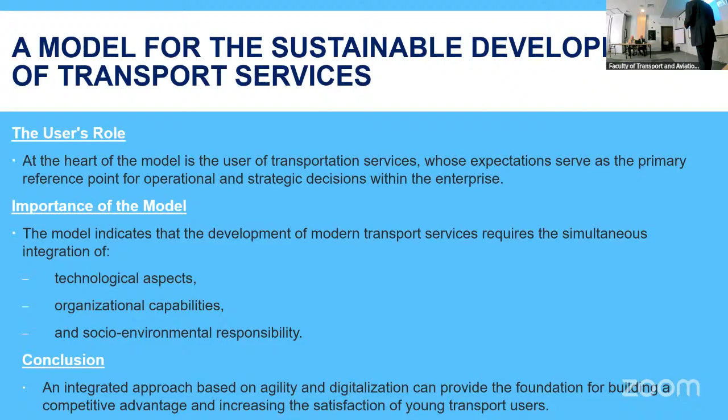Na podstawie przeprowadzonych badań został stworzony model, którego sercem jest użytkownik usług transportowych, którego oczekiwania stanowią główny punkt odniesienia dla decyzji operacyjnych oraz strategicznych przedsiębiorstwa.

Model ten teoretyczny, ale zawierający następujące główne założenia, a mianowicie integrację aspektów technologicznych, możliwości organizacyjnych oraz odpowiedzialności społeczno-środowiskowych. Oczekiwania młodego pokolenia są wysokie, co wskazuje na kluczowe znaczenie jakości oraz nowoczesności.

Trudno dzisiaj wyobrazić sobie jakiegokolwiek młodego człowieka bez telefonu, bez mobilnej apki, który nie oczekiwałby również, aby informacje, które do niego spływają i które mają wpływ na jego decyzje, nie miały charakteru mobilnego. A więc cyfryzacja i komunikacja z klientem mają szczególne znaczenie, stanowią najważniejsze wymiary w ocenie jakości transportu, usług transportowych.

Sprawność organizacyjna przedsiębiorstwa, która tutaj zostało sformułowane jako zdolność do szybkiego reagowania i dostosowania się do zmian. Ja bym dołożył do tego coś, co ex post wyłoniło się z tych badań, a mianowicie w mojej ocenie to jest przede wszystkim kultura organizacji, która decyduje o tym, w jaki sposób firma buduje swoją markę i pozytywny wizerunek.

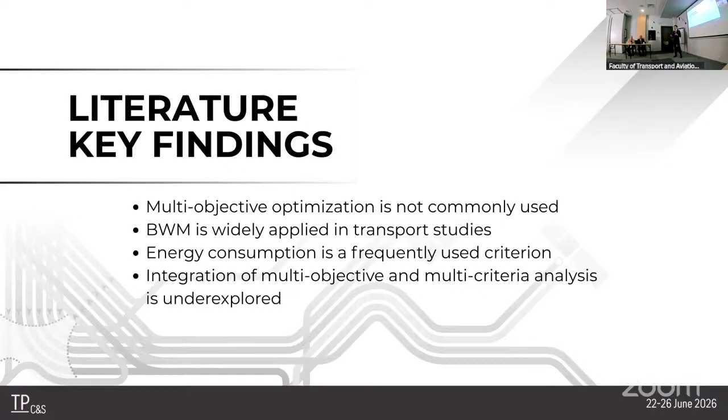A literature review was provided. The main findings are listed here, but most importantly, integration of multi-objective and multi-criteria analysis is still underdeveloped, underexplored, although individually both methods are widely studied.

Our research consists of six main steps. You can see them listed here. The first one is determination of variant schemes, then defining the criteria for evaluating those schemes, solving the criteria weights by applying a multi-criterial analysis, then multi-objective optimization to determine the optimal variant scheme, and finally performing a verification by another optimization method.

As I mentioned before, the first step is determination of the variant schemes. There are certain assumptions for this study, and the main assumption is that no investments are done to improve the infrastructure or the fleet. So the variant schemes differ from one another by the number and the type of the routes they have.

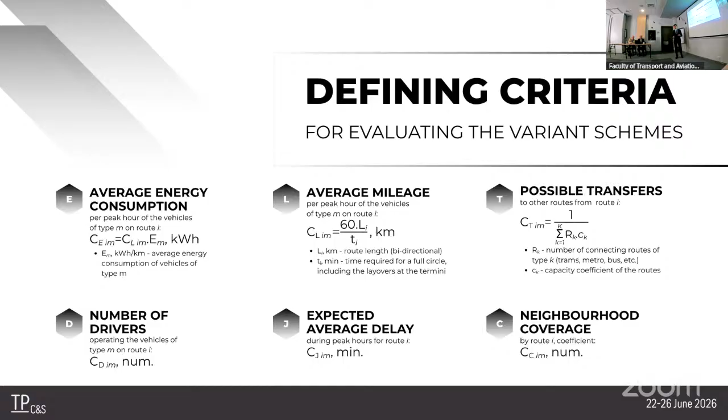6 criteria were defined during this study. The first one is average energy consumption, which was considered the most important criteria for the literature review. Others include average mileage per peak hour of the vehicles, possible transfers to other routes, the number of drivers needed to operate the system, expected average delay, and the coverage by the routes of the neighborhoods in the city.

In order to solve the multi-objective optimization problem, Best-Worst method is used to evaluate the criteria weights. Experts identify the most important and the least important criterion, and then the rest of the criteria are compared pairwise. To evaluate their weights, optimization is performed.

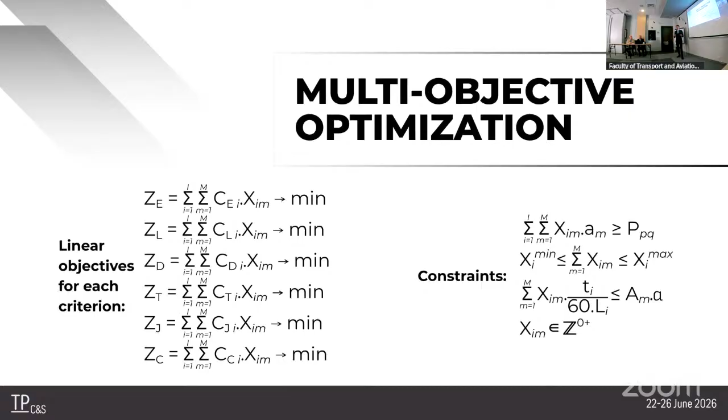So in order to solve the problem, for each criterion, linear objective functions are formed. You can see them here on the left side. And the constraints represent the assumption that no additional improvements are made to the fleet. So we need to keep the number of vehicles used below the total number of vehicles in the city, and also the passenger flow in each section to be below the capacity of this section for the current variant scheme.

Compromise programming is performed to optimize the 4 variant schemes. In this method, the shortest distance to the ideal point is found, and of course the result has to be the closest one to the ideal point and as far as possible from the nadir point.

Verification of the results is performed by another optimization method of the same type. It is a modified epsilon constraint method. The main objective of this method is a function identified as the most important criteria, and the rest of the objective functions are transformed to constraints. Of course, we keep the other constraints as well.

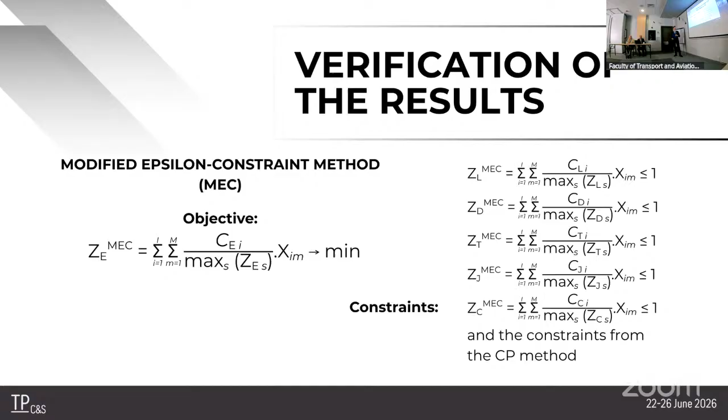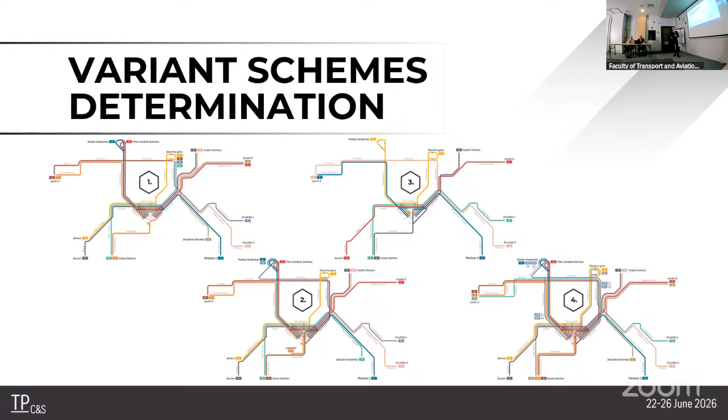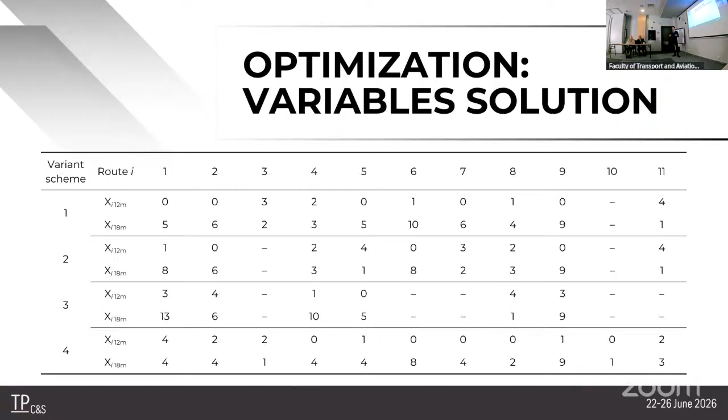These are the results from the optimization process. This table shows the allocation of each vehicle for each route. So this is the main result for the 4 variant schemes.

The optimization results determine that variant scheme number 2 achieves the best overall performance. The consistency between the optimization and the verification actually confirmed that variant scheme number 2, which in both rankings is in first place, is most likely to be the optimal variant scheme.

So in order to evaluate the robustness of the criteria weights, sensitivity analysis was performed. And the results show that the selected optimal solution remains stable for the different scenarios.

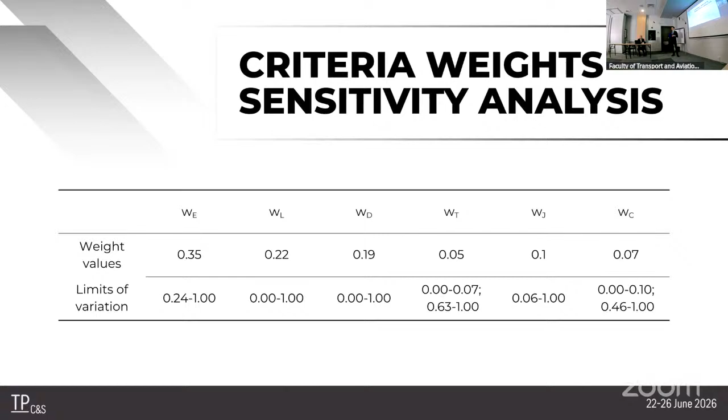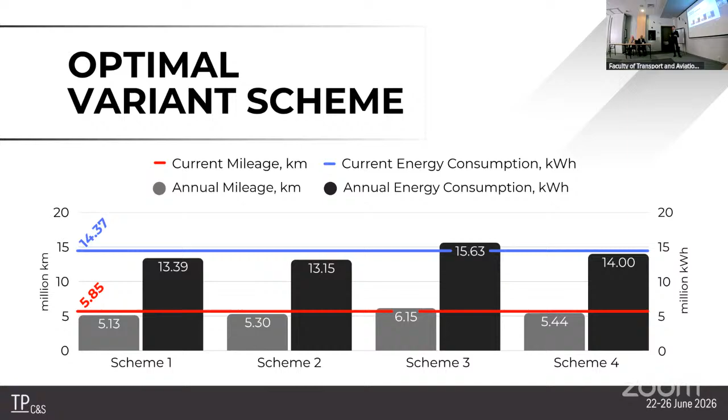The conclusions are that an integrated Best-Worst method and compromise programming can be used to make optimizations of such a network. Criteria were defined to assess the trolleybus transport plan. Energy consumption was identified as the most important criteria. The methodology was applied successfully to the Sofia trolleybus network.

The optimal scheme reduces the energy consumption and the mileage. And most importantly, this whole methodology is applicable to other trolleybus networks, and by slight modifications, it could also be applied to other networks at all, like tramways or bus networks.

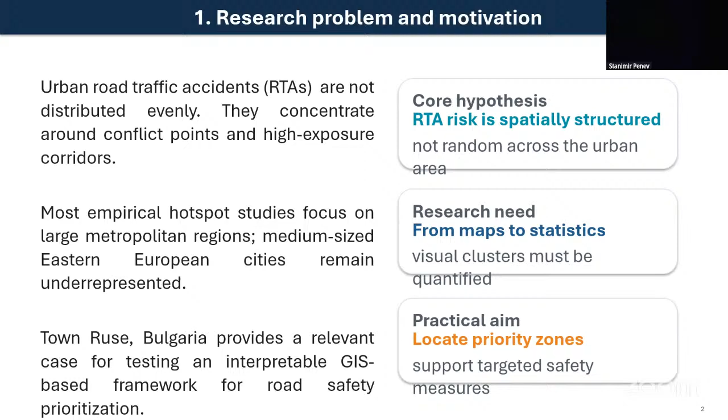Can you change the slide, please? The aim of the study was to identify spatial clustering patterns of road traffic accidents and quantify spatial concentration of accident risk in the studied area. So four main analyses were conducted.

The first one was to construct a grid-based aggregation of the data, which transformed point features, point data, into comparable spatial units. These spatial units had surface measurements and a magnitude that shows whether this small region holds traffic accidents and how many accidents it holds.

This grid-based aggregation was used for the second analysis, the cumulative concentration index, which quantifies spatial inequality. After that, we made an average nearest neighbor analysis, which tests the global departure from randomness, further proving our theory.

The last analysis conducted was a hotspot analysis, which localizes and further confirms our results, localizing the statistically significant hotspots. The study area was the urban area of Ruse, Bulgaria. The period of the traffic accidents was from 2021 until 2025. 1,690 road traffic accidents were included in this study, including 381 injury-related and 12 fatal cases.

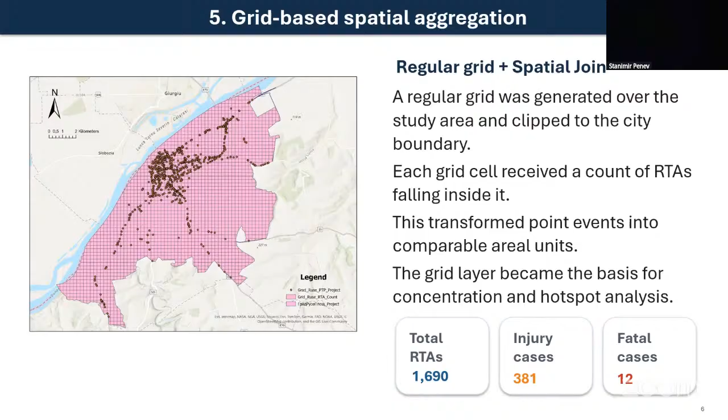The nearest neighbor index was calculated to be below 1, meaning it's highly clustered. The observed average distance to the nearest neighbor between the traffic accident points is related to the expected average distance under the theoretical random Poisson distribution. The observed distance was calculated to be 14.79 meters, and the expected distance was 137.12 meters. The nearest neighbor index was 0.108.

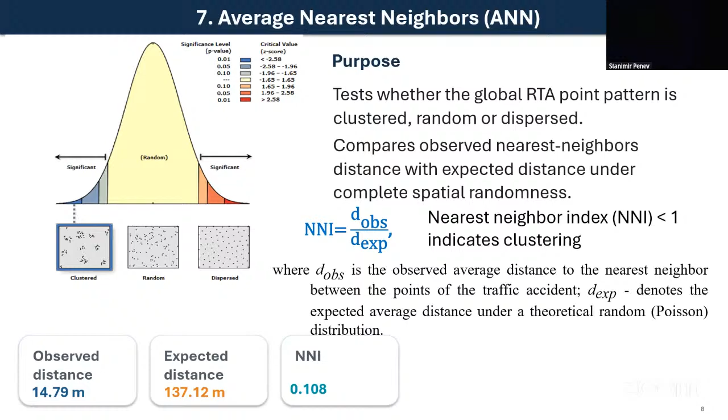The next analysis was the hotspot analysis. A high count cell is not automatically a statistically significant hotspot. The G statistic evaluates whether high values are surrounded by other high values, and the output classifies cells by confidence level from 90% to 99%, as hot or cold spots. In our research we found there are no cold spots—only neutral and hot spots. G compares the local sum of a cell and its neighbors versus the global sum across the whole study area.

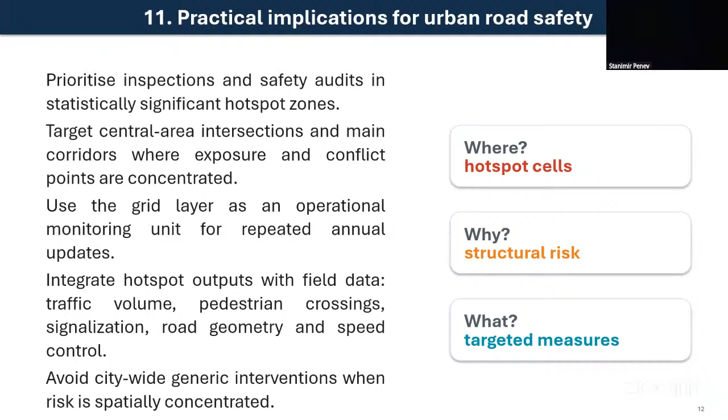The practical implications for urban road safety: prioritize inspections and safety audits in statistically significant hotspots—that's why these hotspot analyses were created. Target central area intersections and main corridors where exposure and conflict points are concentrated; there is a structural risk. The use of the grid layer is operational, and we need to avoid city-wide generic interventions when risk is spatially concentrated.

In conclusion, road traffic accidents in the study area show strong spatial concentration and statistically significant clustering. The concentration patterns become stronger with accident severity. The average nearest neighbor analysis confirms a major departure from complete spatial randomness. The hotspot analysis localizes the main high-risk zones, and the proposed GIS framework—the whole process and model we represented—is transferable, interpretable, and useful for medium-sized cities. The end result is that we created, from raw data records, spatial priorities shown on the map, which can be input into other similarly sized areas of study.

Next slide is from model selection to a forecasting protocol. Limitation of existing approaches: a specific model class is often assumed to be superior, comparisons are limited or in-sample, and different pollutants are treated too uniformly. Operational application is not always demonstrated. Research objective: to develop and empirically validate a structured forecasting protocol for short-term prediction of these four parameters. Working hypothesis: there is no universal best model; the appropriate specification depends on the statistical structure of the series.

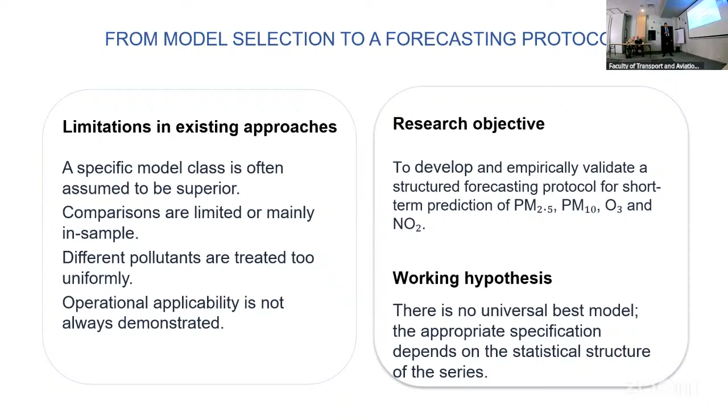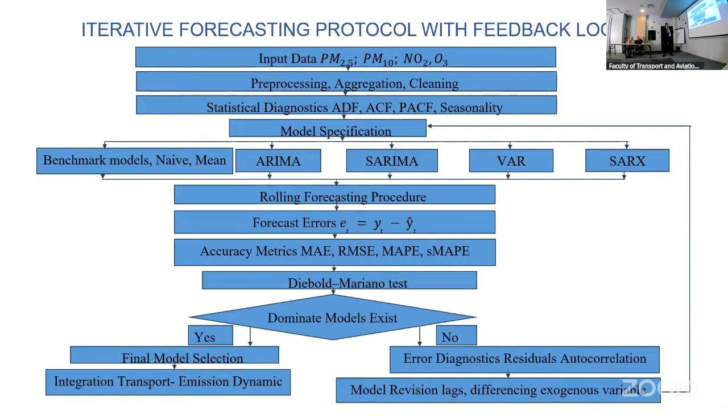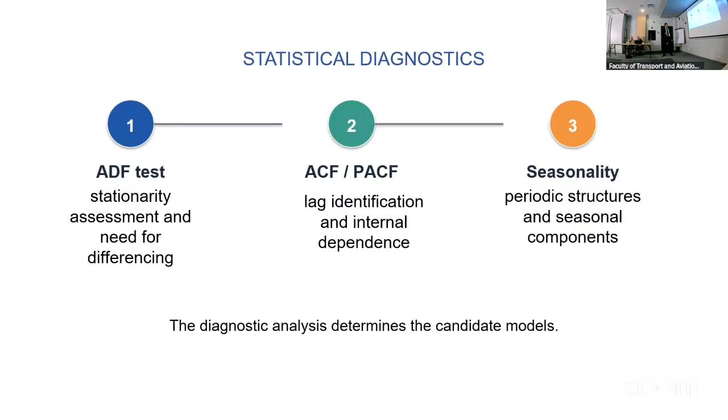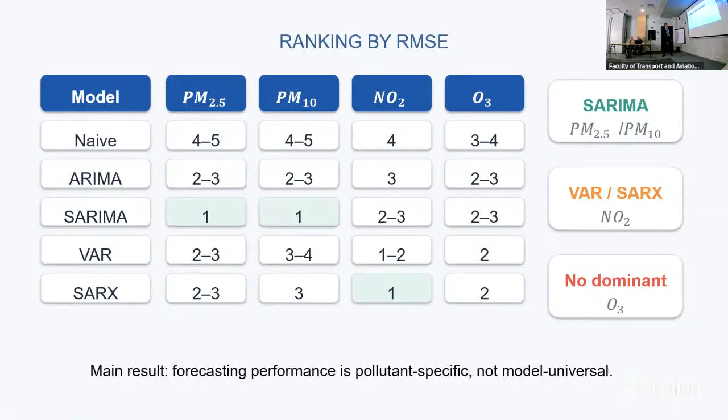These candidate models — you can see five models. The logic is benchmark in univariate structure, seasonality, multivariable dependencies, and selective dynamic effects. This is the one-step-ahead evaluation, with ranking information. SARIMA performs best for PM2.5 and PM10, VAR and SARX for nitrogen dioxide, and no dominant model for ozone — this is the result here.

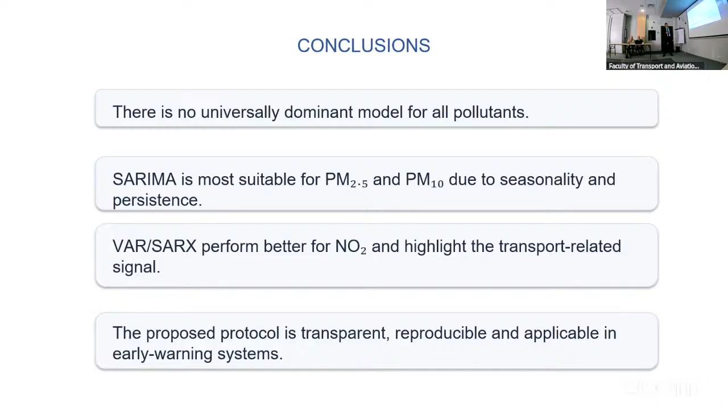Conclusion: there is no universal dominant model for all pollutants. SARIMA is most suitable for PM2.5 and PM10 due to seasonality and persistency, whereas VAR/SARX perform better for nitrogen dioxide and highlights the transport-related signal. The proposed protocol is transparent, reproducible, and applicable to early-warning systems. Thank you for your attention.

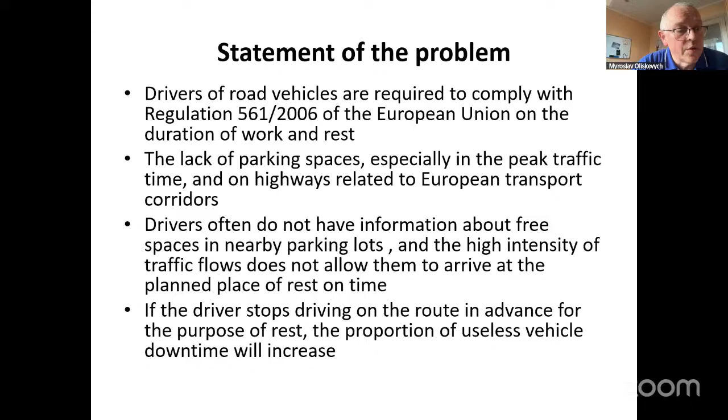Next slide, please. Parking trucks can become a serious safety problem when drivers don't have timely information about where free spaces are. The driver must decide to continue driving tiredly in search of free parking spaces, or to park in violation of the rules, for example on the shoulder near highway exits. Both situations pose a serious threat to safety.

Next slide, please. The problem is made more serious by the fact that the intensity of free parking spaces changes over time, and that is too uneven. Also, information about free parking spaces is unreliable.

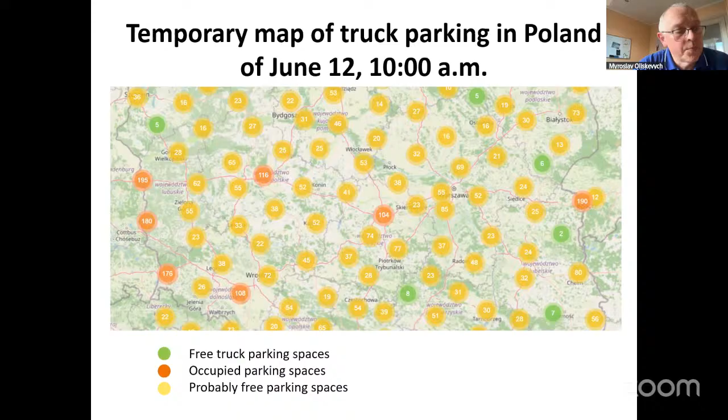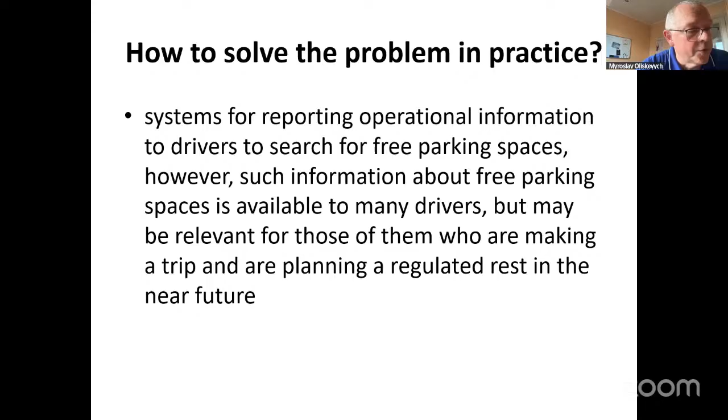Next slide. How is this problem currently being solved in practice? First, there are information services that inform drivers about free parking spaces in advance. However, by the time drivers reach the location, it might already be occupied. Otherwise, the driver faces the unpleasant situation of violating rules, such as Regulation 561 of the European Union. Next slide, please.

Developments in the field of intelligent parking, as well as proposed approaches to solving the problem based on artificial intelligence, do not provide a clear vision of the transition processes of implementing the latest solutions.

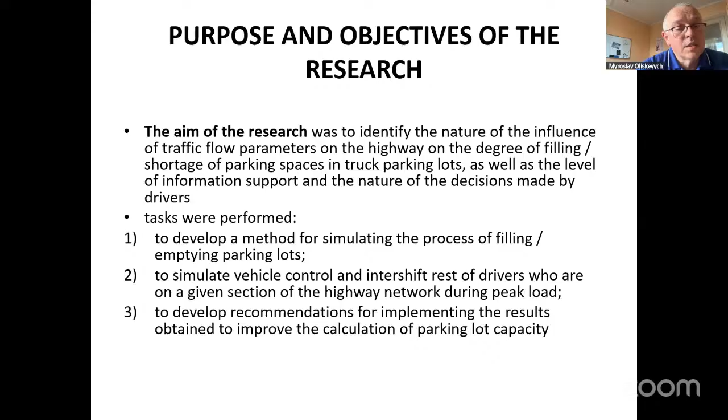The basis of our approach to solving the problem was the assumption that the required number of parking spaces has a non-linear dependence on the intensity of traffic on the highway, where truck drivers are looking for an opportunity to park for intershift rest. That is why we used simulation modeling of the parking process.

The next problem formulated and solved in the work was as follows. A highway was considered, consisting of a minimum of 4 lanes, 2 in opposite directions. The lanes are divided by double horizontal marking of type 1.3 according to road rules. In each direction, there is a possibility for vehicles to overtake. Exit to parking lots on both sides of the road is possible, in both the forward and reverse direction of the highway, and exit from each parking lot to the highway is also allowed from both sides. The intensity of vehicles exiting from parking lots is equal to about 5% of parking needs during the peak period.

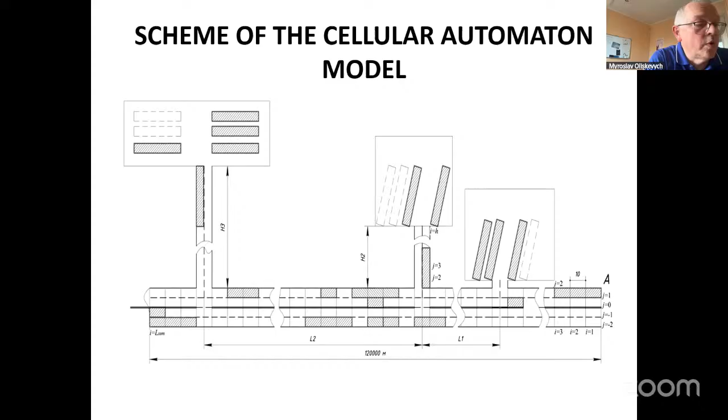The simulation results of each step were evaluated by the following indicators. First, the level of parking occupancy is estimated by the occupancy rate. Second, the minimum level of satisfaction of driver needs for free parking spaces for rest. If the driver does not have information about free parking spaces, but his allowed driving time is T-minimum, then we must determine whether his need is satisfied.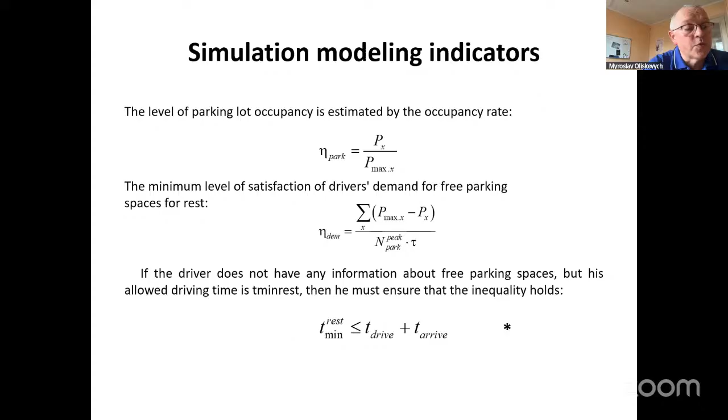Cases of searching for a parking space depending on the available information about the occupancy of the nearest parking lots.

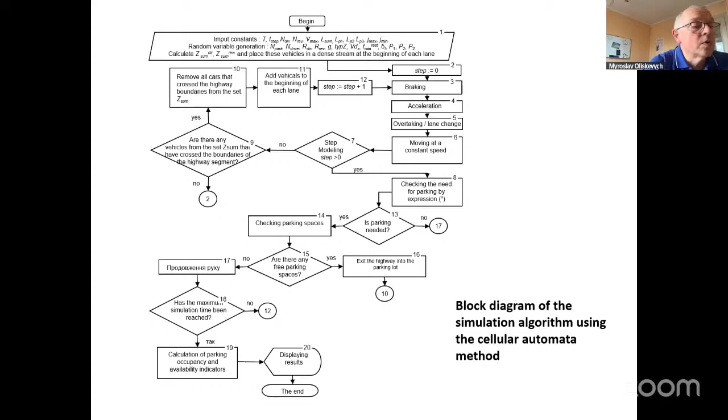A modified simulation algorithm and a computer program for it have been developed.

The simulation was performed under variable initial conditions: the total intensity of the traffic flow in the forward and reverse directions of the highway, as well as variable average density of the traffic flow. In the first group of experiments, the simulation was carried out with 3 parking lots on a 120 kilometer section of highway, with a total capacity of 45 parking spaces.

In the second group of experiments, the total capacity of parking lots was increased by 33%. The obtained dependencies allow us to identify patterns in the functioning of the parking lot network and increase the accuracy of calculating capacity.

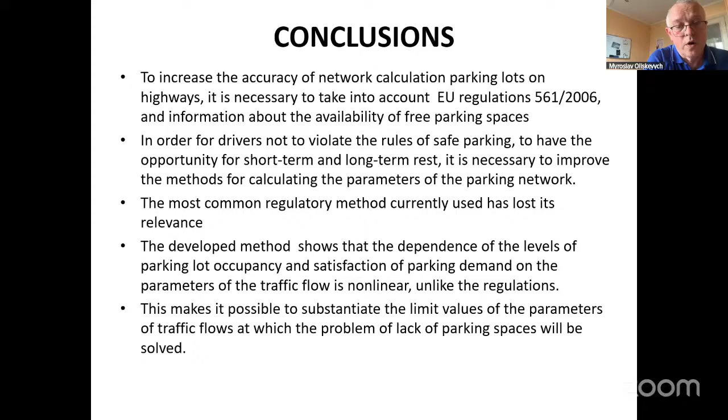Thank you very much. Thank you.

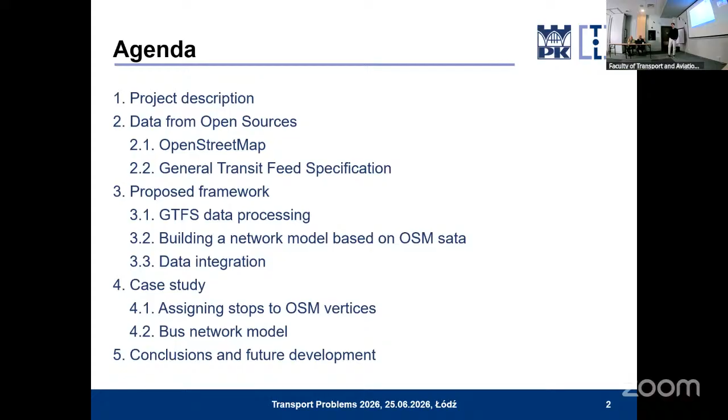Talking about the project, it's a research and development project in cooperation with DPK system, titled An Integrated Transportation Planning System for Metropolitan Public Transportation, with a focus on electromobility and flexible adaptation to rapidly changing conditions. Our cooperation is concentrated on the second part, flexible adaptation to rapidly changing conditions.

So we had a problem. We needed a functional graph that would allow us to use customizable algorithms and different sources of data, maybe our own data, maybe open source data, to conduct our future research. It had to consist of a road network and a public transportation network. We decided to use open source data because it's free and widely used throughout the world.

Talking about transportation and road network, what can we use? Of course, OpenStreetMap, one of the widely used open source datasets. We can use three main options to import the data: Planet, Overpass API, and OSMnx.

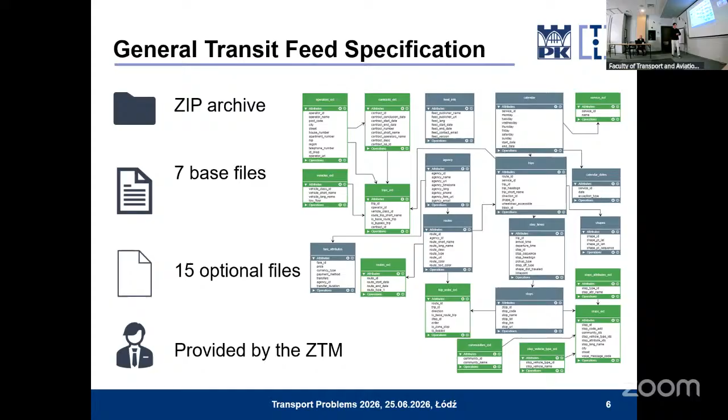On the right side, you see the structure of a GTFS file from the GZM area, Górnośląsko-Zagłębiowska Metropolia, the main city of which is Katowice. Every square represents one file. The green ones are an extension of the optional files and main files. It's provided by the ZTM, Zarząd Transportu Miejskiego.

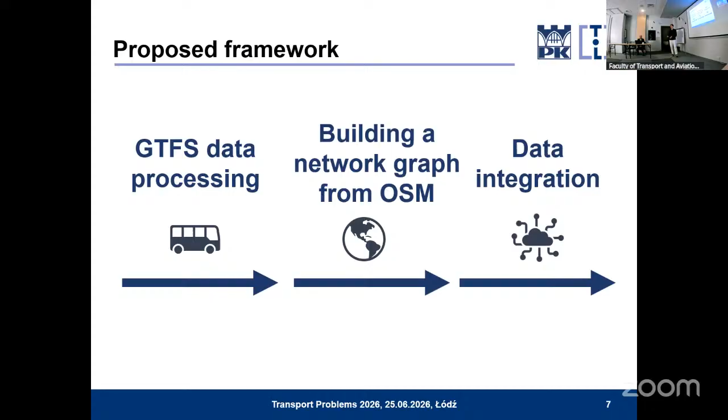Talking about our proposed framework, it's a 3-step approach. In the first step, we process GTFS data, then we build a graph network using OpenStreetMap, and finally integrate all the data together.

The next one is, of course, the graph network. On the right side of the slide, you can see the road network of the GZM. It's really enormous: 35,000 nodes, 80,000 edges, nearly 28,000 intersections. Total length of the roads is more than 14,000, with this average length and nearly 3 average number of streets per node.

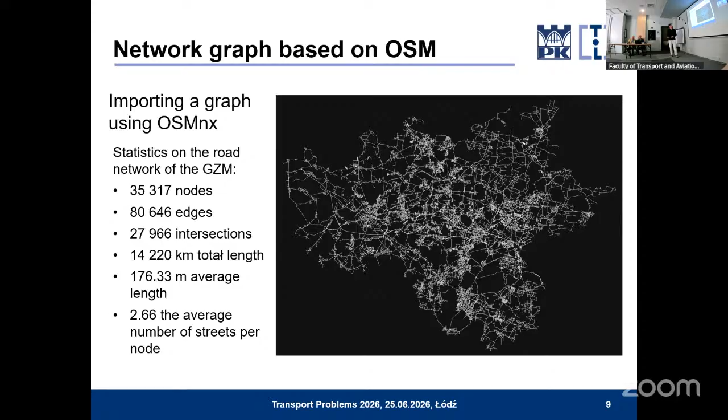Talking about data integration, we had a few steps. We had to filter out the stops with no trips assigned, because that's a real problem with GTFS—not every stop is managed by buses. So if a stop wasn't linked to any trip, we discarded it. If it was, we applied a 2-step approach: find the nearest edge to the stop, then the nearest node from this edge to the stop. This is because of geographical distance issues we had when defining the path from shape to stop to node. Then we save the graph and export CSV files with stops and nodes.

And we validated our framework on the PKM Katowice routes. They operate on 56 routes across the GZM, not only in Katowice. You will see this in the next couple of slides.

It managed 1,281 bus stops and 3,162 trips. Talking about the GTFS published by ZTM, it's a really huge database merged for every operator. For example, in Krakow, one operator has its own files. In Katowice, no.

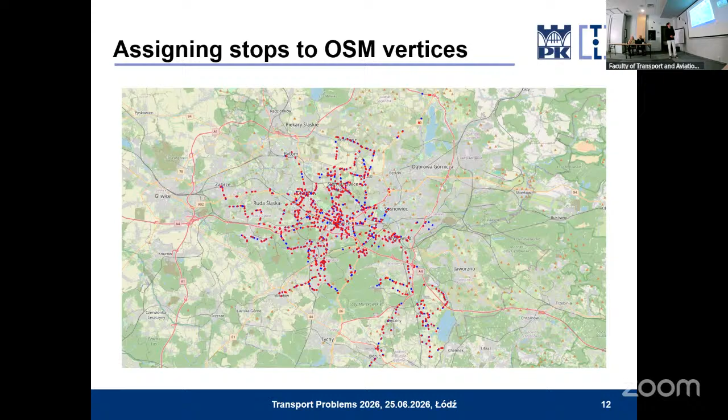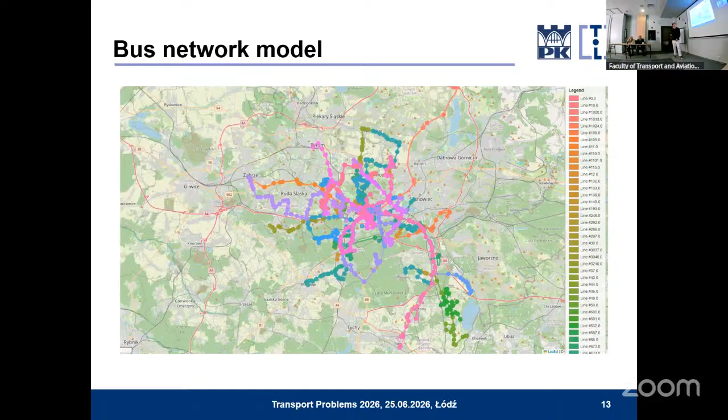Now talking about conclusions and future development: we presented our three-step framework for modeling the transport network with open source data. It was developed in Python, and the main goal was to have a fully functional graph that can be used for future development and research—for example, for emergency rerouting of public transportation in case of accidents, or when civil works will be there, and many other use cases for this graph.

Thank you for your attention.

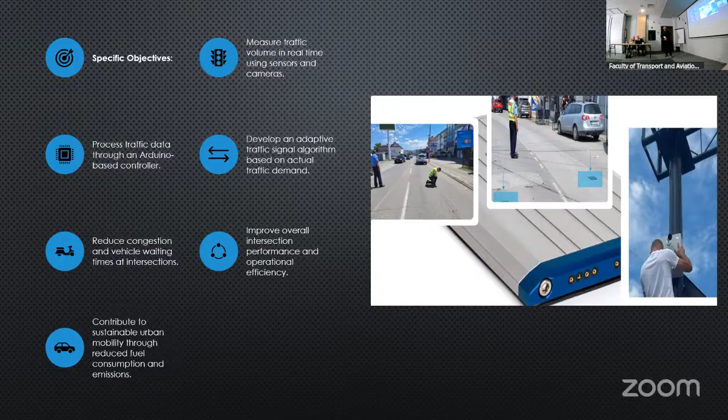In another case, we used a simple camera together with the YOLO algorithm to measure the volume of traffic at the intersection. Two of our students were involved in this research and realized traffic control by constructing a prototype based on smart techniques. In the first prototype, we used an Arduino microcontroller and two types of sensors, infrared and ultrasonic, to measure the queue of vehicles at the stop line of the intersection.

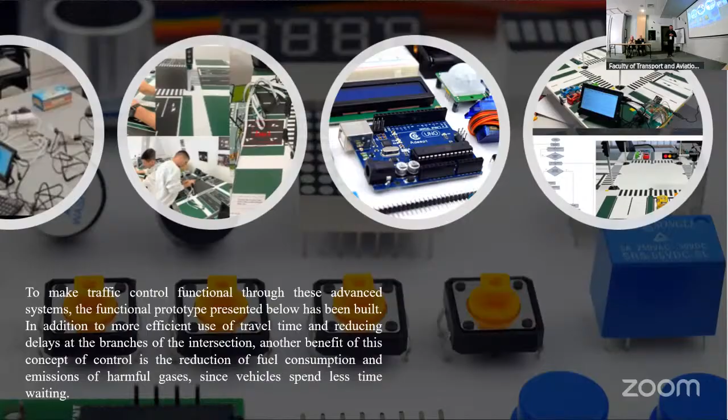The principal work of this prototype is based on real traffic data from each arm of the intersection. When the first vehicle arrives at the stop line, the infrared sensors measure this and send information to the controller indicating vehicles present in this arm. Then priority is given in the traffic light, and the green light turns on for this arm. Next, if any sensor in any arm of the intersection detects the presence of vehicles, the green light opens for that next arm. But we must limit the maximum green time, because if there is demand from all arms of the intersection, we have to cap the maximum green light duration.

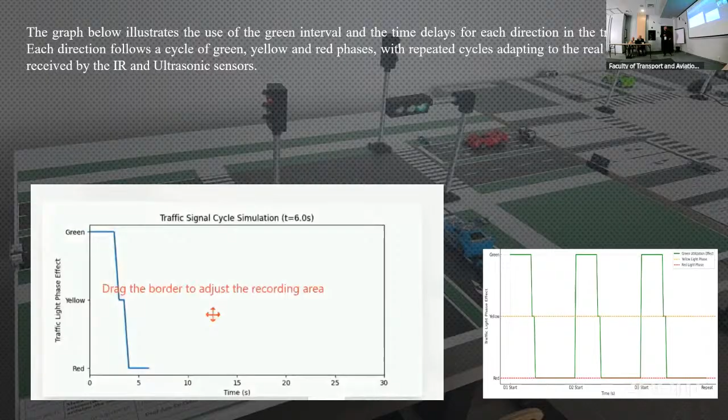This is the principal work of this prototype, involving technology and smart techniques using microcontrollers and sensors. The results also prove this — you can play the short video showing this diagram. The results show we achieve more effective green time usage at this intersection by using these devices and this technology.

This research and these prototypes have also been part of the sustainable urban mobility plan of some cities in Kosovo, and in the smart component field, we proposed implementing this kind of solution. I am happy to share that some municipalities in Kosovo have started using this kind of prototype, because as I said before, all intersections are controlled by traffic lights in principal operation. Please, you can play the video.

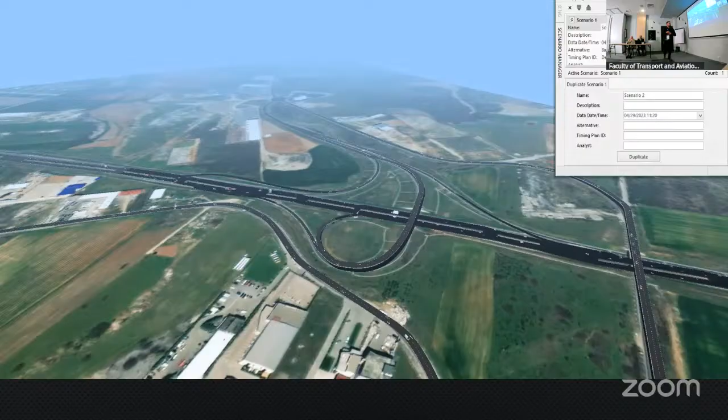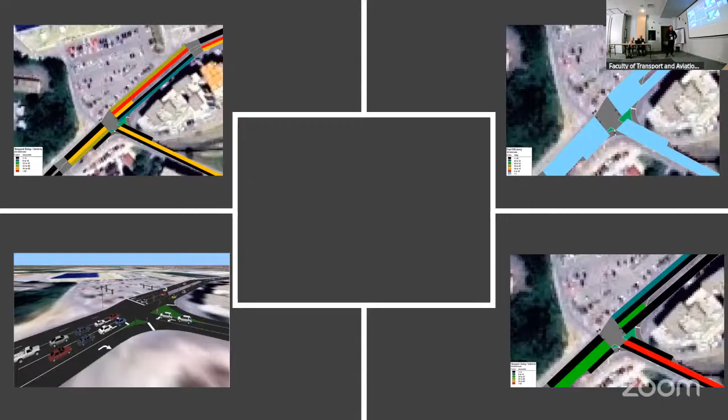In this case, we also used software to analyze some traffic indicators, including traffic delay at the stop line of the intersection. The entire road network of the city is included in the simulation, along with two intersections controlled by traffic lights where we applied this proposed research. When we analyzed traffic indicators for the intersection controlled by traffic light, we saw that some indicators improved, and overall the performance of traffic operation at the intersection improved compared to traffic lights controlled by fixed timing.

As a conclusion, I can mention that traffic delay at the intersection, based on real traffic data from each arm, is improved. Also, fuel consumption is improved at this intersection because we reduced red light time, and vehicles wait more or less accordingly at the intersection. This is also in line with sustainable urban mobility principles.

So I think the best solution for traffic management is to combine political support with technology, and integrate responsibility from institutions and from industry. Thank you very much for your attention.

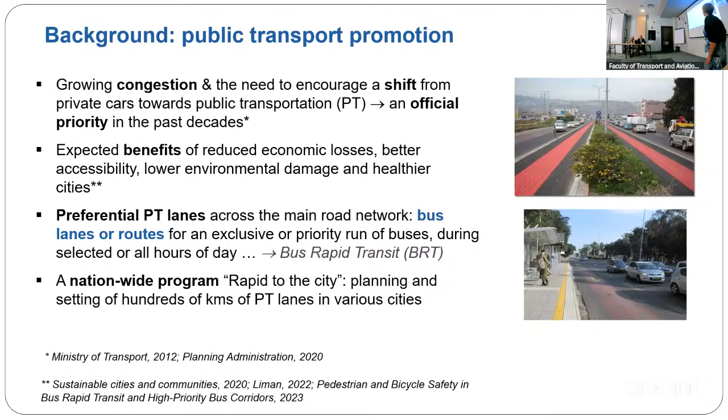Currently, preferential lanes for public transport are established across the main road network of the country in the form of bus lanes or routes for an exclusive or priority run of buses during all or selected hours of the day. The ultimate form of such arrangement is known as bus rapid transit, or BRT. Nowadays, a nationwide program termed Rapid to the City is implemented in the country, which includes planning and setting of hundreds of kilometers of public transport lanes in various cities.

To attain the mobility and other benefits associated with public transport priority, driver compliance with such priority settings is needed. The national traffic signs regulations in the country demand to indicate such lanes using yellow marking with yellow diamonds on them. You can see it in the picture.

In addition, we have guidelines for planning BRT, bus rapid transit lanes, and there we can see the addition of red color stripe marking on such lanes.

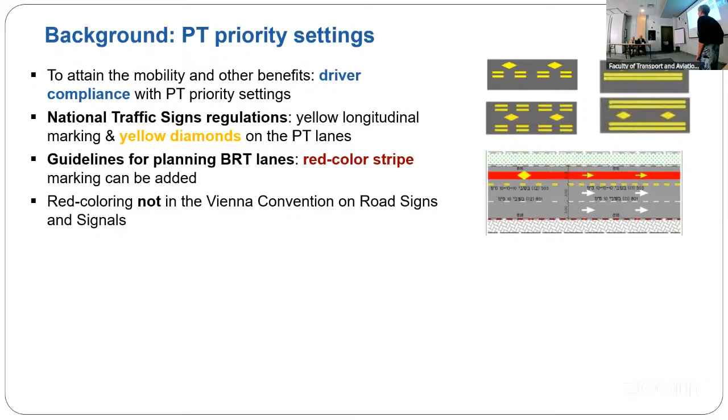However, such special coloring of public transport lanes is not included in the Vienna Convention on Road Signs and Signals. In local practice, the use of special red coloring of public transport lanes began more than a decade ago, since the introduction of a new BRT system in the north of the country. Obviously, it was intended to highlight the special arrangements and to strengthen driver compliance with the new settings.

Over the years, special coloring was applied in additional cities. However, the manner of its use differed between the authorities. Furthermore, special coloring requires regular maintenance, and this means additional costs.

As a result, we received different opinions in the professional community of the country, and the Ministry of Transport decided to conduct a study which should consolidate insights from international experience on the topic, and also include a field experiment to examine the effectiveness of such coloring.

The first part of the study was a literature survey, which focused on two types of documents: first, regulations and guidelines from different countries regarding the need for such special coloring and the form of its application, and second, empirical studies which measure the impacts of such coloring on driver behaviors.

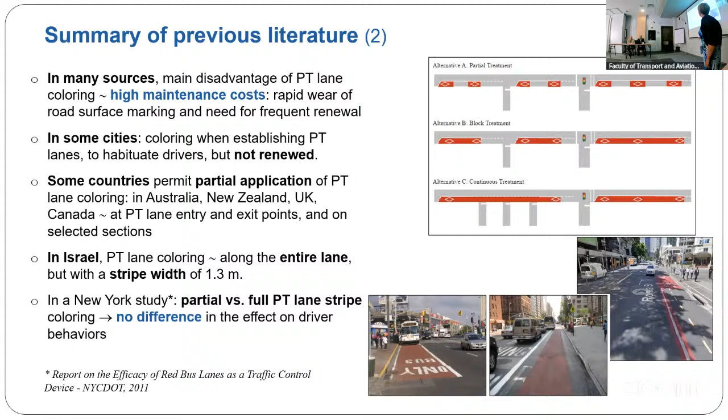Observational studies on the impacts of special coloring of public transport lanes are not frequent in the international literature. We found a few studies which included field experiments and observations from several cities in the United States, Canada, and the United Kingdom. They typically reported positive impacts of such coloring, resulting in lower use of special lanes by private cars, improvement of bus travel times, and a lower need for police enforcement of such arrangements.

But overall, in summary, a range of practices exists in the international literature, where some countries do apply special coloring, but others do not. In general, it is considered a complementary and not obligatory treatment.

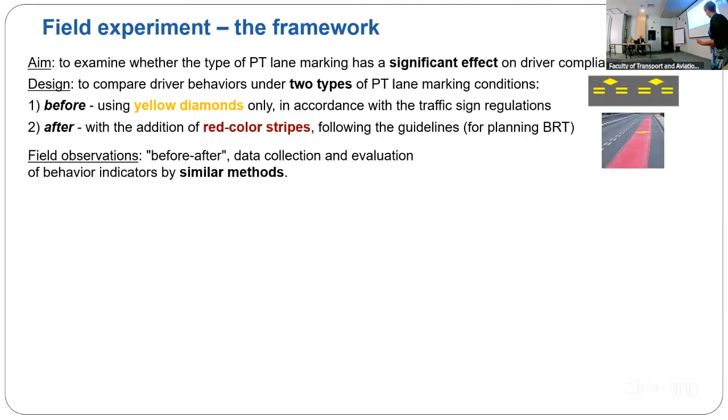In the field experiment in this study, we aimed to examine whether the type of lane marking has a significant effect on driver behavior. The study compared driver behaviors under two types of PT lane marking conditions: before, using yellow diamonds only, and after, with the addition of red color stripes. Under both conditions, field observations were conducted using similar methods for data collection and for the evaluation of behavior indicators. After long consultations with national and local authorities, the municipality of Jerusalem agreed to conduct the experiment.

For that, one route was selected, an urban arterial with a dual carriageway layout. It has a right side public transport lane in one direction with an additional lane for general traffic. Along the road, two sites were selected for observations, one on the road section and another in the area approaching a signalized intersection. At both sites, video cameras were installed to collect driver behaviors, done in each period for 2 days, along 5 hours of highest traffic volumes.

Here you can see the view of the road under before and after conditions, meaning with yellow marking only and with the addition of red color stripes.

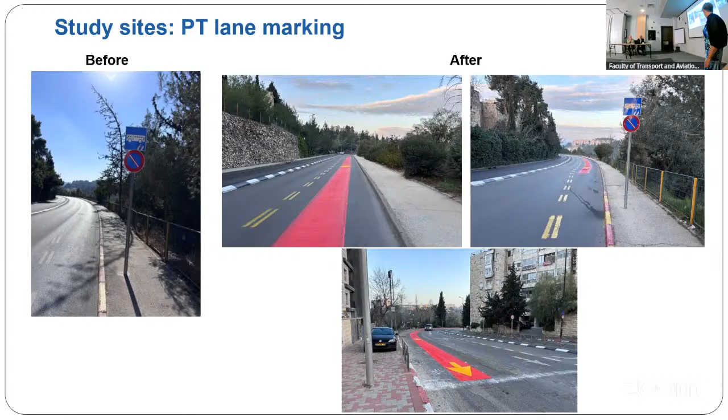The results show that concerning the hourly traffic volumes at the study sites, in the after conditions with the addition of red color stripes compared to the before, in the total traffic volume actually no significant change was observed, just a slight increase of about 2%. On the general traffic lane, again an increase was observed by 6 to 8%, but not significant. In contrast, on the public transport lane, a significant decrease was found by 17 to 27%.

Concerning the rates of illegal vehicles that use the public transport lane, in the after conditions compared to the before, on the road section at site 1 only a slight decrease was observed and not significant. However, near the intersection at site 2, a significant decrease was found of 22% on average, and this decrease was consistent and significant in both days and across most observation hours in the study.

In summary, the study results show that the addition of red color marking to the public transport lanes improved drivers' compliance with such arrangement. We found in the intersection area a notable and significant reduction of 22% that was consistent across most observation hours. On the road section, only a slight decrease was observed.

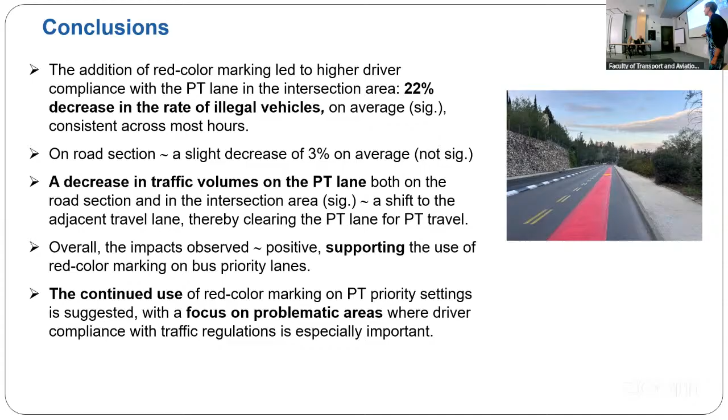Based on the study results, the continued use of red color marking on such public transport priority settings was suggested, with a focus on more problematic areas where driver compliance with traffic regulations is the most important. I thank you for your attention.

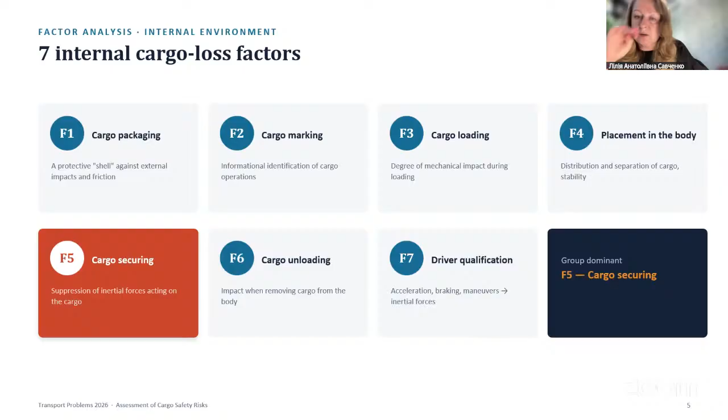Внутренняя среда – это 7 факторов: упаковка, маркировка, погрузка, размещение в кузове, крепление, выгрузка и квалификация водителя. Доминантной группой закономерно оказывается крепление груза, поскольку именно оно гасит инерционные силы, действующие на груз в процессе движения.

Внешняя среда – это 8 факторов: природно-климатические, политические воздействия, аварийность, криминальные действия, техническое состояние транспортного средства, состояние груза, сопроводительные документы и дорожное воздействие. Здесь доминантной выступает дорожное воздействие, то есть состояние покрытия дороги, геометрия дороги и информационное обеспечение.

К оценке привлечены 10 экспертов, специалистов транспортной отрасли. Они работали с 15 факторами и сформировали 2 матрицы попарных сравнений. Согласованность матриц проверена по методу Саати.

То есть максимальное собственное значение около 8. Индекс согласованности порядка 0,024, отношение согласованности где-то 0,017. И поскольку отношение согласованности существенно меньше 0,1, матрицы признаны согласованными, а экспертные суждения непротиворечивыми.

Весовые коэффициенты подтверждают качественный анализ исследования. Во внутренней среде с большим отрывом лидирует фактор F5, то есть крепление груза, с весом около 0,224. Во внешней среде наибольший вес у фактора Z8, дорожное воздействие.

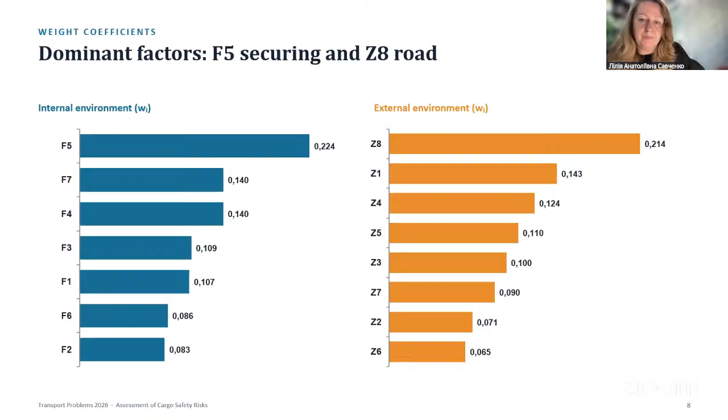Для перевода качественных проявлений в числовую форму введена 6-уровневая шкала от S0 отсутствует со значением 0 до S5 критической со значением 5. Проявления факторов, выявленные в опросе, систематизированы по степени проявления риска и по группам среды. Это распределение служит входной базой для метода анализа иерархии. Для доминирующих факторов крепления получается критический уровень 5, S5, а дорожное воздействие это высокий уровень, S4.

В результате проведенных исследований итоговый интегральный индекс риска составил 0,56, что соответствует уровню выше среднего. То есть внутренние факторы формируют 56% значения индекса. Наибольший вклад вносит крепление груза и дорожное воздействие. За ним следует квалификация водителя и размещение в кузове. Это означает, что управляющее воздействие нужно концентрировать в первую очередь именно на этих позициях.

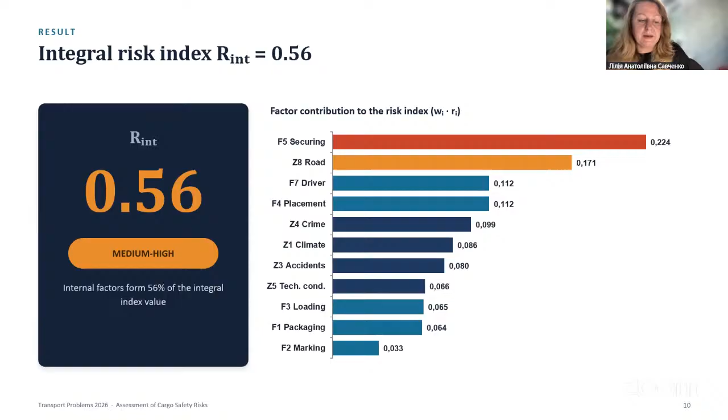Подытожу. Первое: разработан алгоритм, последовательность процессов качественного и количественного анализа риска для конкретного вида перевозок. Второе: внутренняя доминанта, то есть крепление груза, что подчеркивает критическую роль технологической дисциплины и контроля средств крепления. Третье: внешняя доминанта, дорожное воздействие, то есть сохранность груза зависит от состояния инфраструктуры.

И четвертое: ключевая доминанта, значение индекса 0,56, имеет системный характер. Его нельзя снизить локальными решениями. Необходим комплекс технических, организационных и инфраструктурных мер.

Благодарю за внимание. Предложенная методика носит универсальный характер и может быть адаптирована под конкретный вид груза и маршрут. Спасибо за внимание.

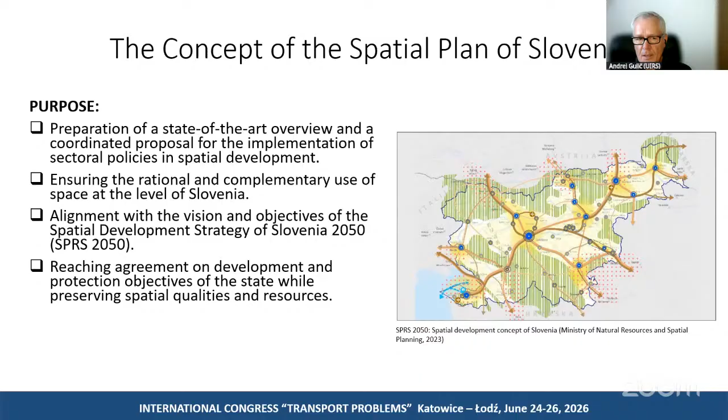The main two objectives of this expert basis are establishment of a coordinated national planning framework and the support for the spatial allocation of key development projects up to 2050. The content of the concept has five main chapters: settlements, transport infrastructure, energy, landscape, and natural resources.

The main aim of my presentation is to concentrate on the content of the first two chapters, settlements and transport infrastructure. Please, next slide.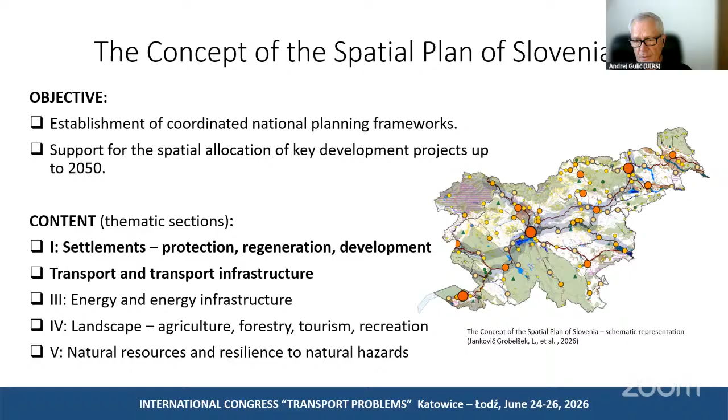Well, the concept of the Spatial Plan of Slovenia represents a set of coordinated professional baselines for the preparation of the Spatial Plan of Slovenia as a national planning document.

The Spatial Plan of Slovenia in preparation represents the first comprehensive national spatial document since 1986, when the long-term plan of the Socialist Republic of Slovenia for the period from 1986 to 2000 was prepared.

In this 40-year interim period, we have prepared two very important strategies. The first one was prepared in 2004 and the second one in 2023, and also numerous national special plans predominantly focused on the planning of transportation infrastructure. Please, next slide.

In these periods of 40 or 45 years in Slovenia, we built 630 kilometers of motorways and expressways. The first section of the motorway was built in 1972, and it was only 32 kilometers long, but it was the first one, not only in Slovenia, but the first one in the whole ex-Yugoslavia.

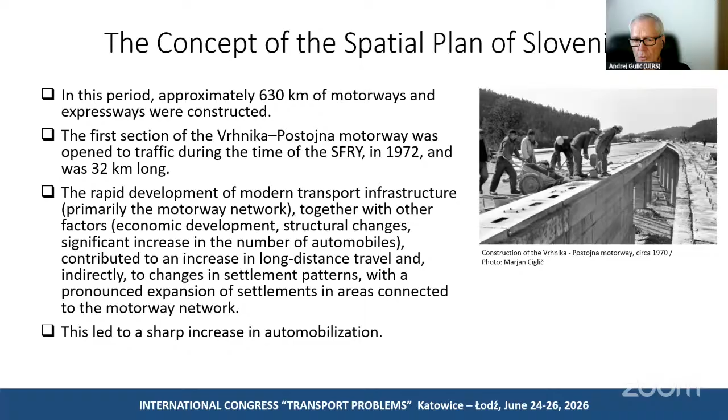This rapid development of transport infrastructure primarily focused on the motorway network, together with other factors such as economic development, structural changes and so on, significantly increased the number of automobiles. This increase contributed to long-distance travel and indirectly changes in settlement patterns, with a pronounced expansion of settlements in areas connected to the motorway network, leading to a sharp increase of automobilization. Please, next slide.

That's why the concept of the Spatial Plan of Slovenia proposed the concept of transport accessibility on 4 different levels: international level, national level, regional level, and local level.

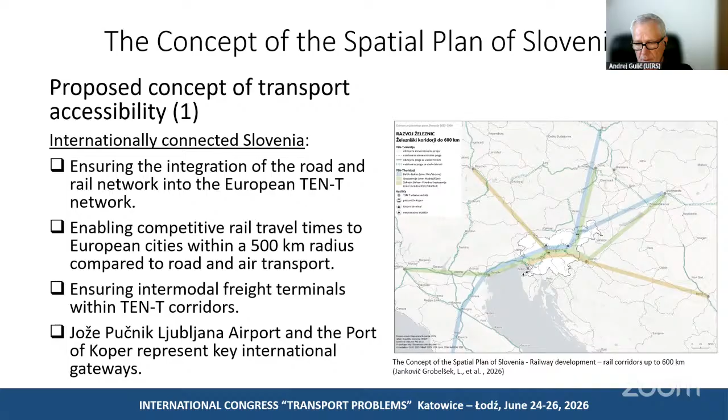At an international level, it is the so-called internationally connected Slovenia, and this concept is structured with 4 items. The main topic is to connect Ljubljana and other urban centers in Slovenia with nearby important metropolitan centers: Milan in Italy, München in Germany, Vienna in Austria, Budapest in Hungary, and Belgrade in the Republic of Serbia. Please, next slide.

At the national level, we named this concept 60-minute Slovenia. This concept ensures accessibility for the population to the first level centers within 60 minutes via the road network, and mutual interconnection of first level centers by rail within 60 minutes. These are very ambitious aims, but our state is struggling with the modernization of the railway network and also building new sections of the road transport network to implement this aim.

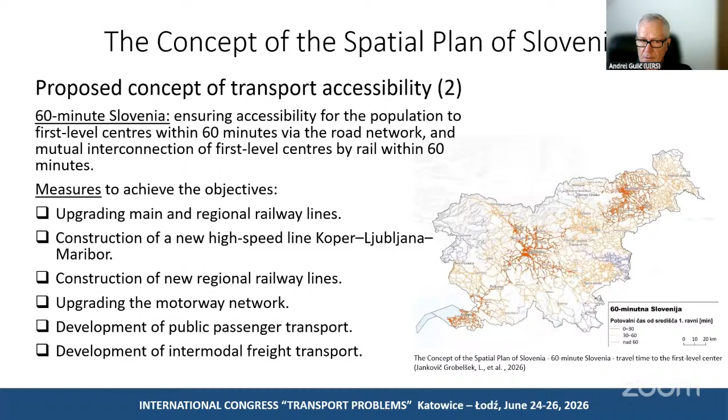And the last level is the level of the local communities. The main aim of this concept is to ensure that local urban areas are connected with different types of transportation within 15 minutes. Please, next slide.

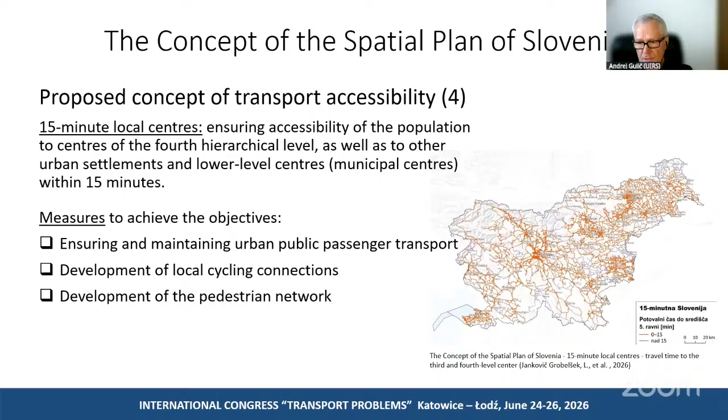The implementation of this concept has very important impacts on ensuring the development of the polycentric system of Slovenia. That means that development is not located only in the main urban centers, but also in less important or smaller centers. Please, next slide.

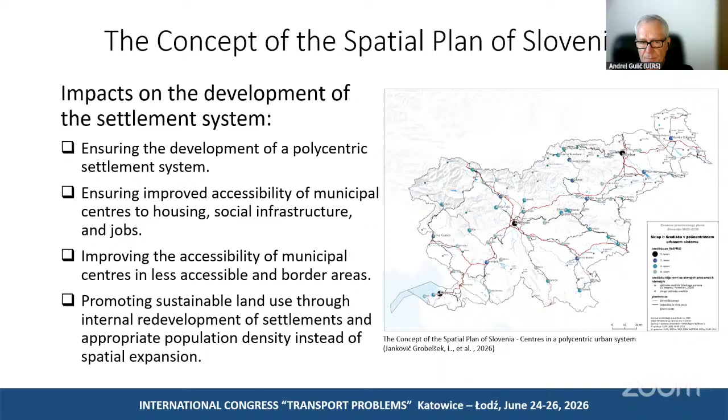These are two maps showing, on the left side, the synthetic map of transport and transport infrastructure, and on the map on the right side, the protection, regeneration, and development of settlements. Please, next slide.

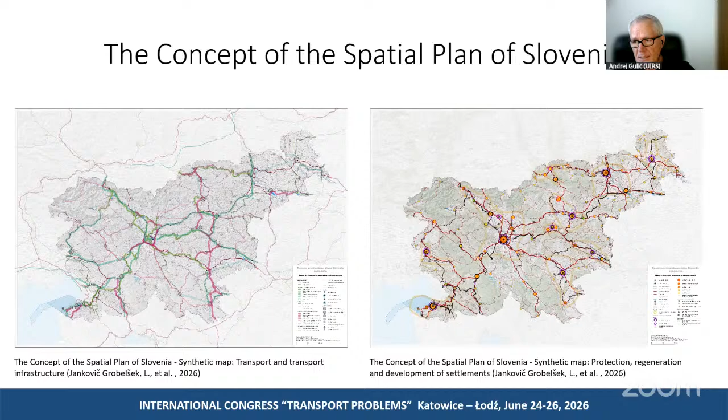So what are the key messages of my presentation? The first message is that the development of transportation infrastructure is not neutral, but has very important spatial effects. The extent of development relying only on motorway development leads to suburbanization, and the rail network is key to sustainable mobility, with accessibility being a key instrument of spatial development.

Thank you very much. Thank you very much for your attention. It was very hard to present the content of my paper in 10 minutes, but I did the best of myself.

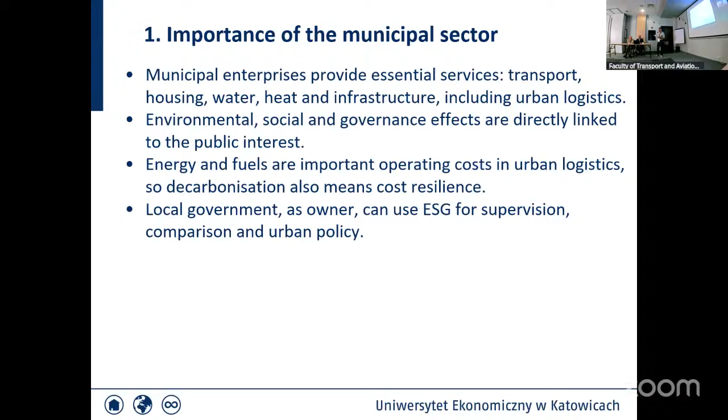The project started 1st January 2025, looking at the potential of the public sector in the green transition. In this project, we analyze ESG regulations and reporting standards. Only the European Union taxonomy is 600 pages of regulations. This is a very, very large problem.

We conducted a CAWI survey of 300 enterprises from the transport and logistics sector, FGI in municipal economy segments including heat, public transport and water, pilot stakeholder maps in two enterprises from the municipal sector, and carbon footprint calculations for public transport operators in the GZM metropolis.

ESG in the municipal sector: the practice is present but fragmented. Municipal companies are improving energy efficiency, modernizing fleets and reducing emissions. But the problem is that these activities are often not connected. So the challenge is not to start ESG in the municipal sector, the challenge is to organize it.

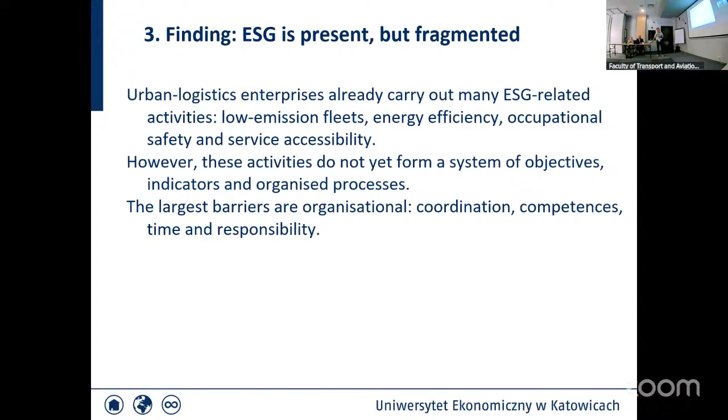Stakeholders - this is a strong problem. Key lesson is that research matters. Different stakeholders have different perspectives and priorities. Good ESG starts with listening to stakeholders. This is a very, very strong and important problem.

Carbon footprint of public transport in GZM: for operators of public transport in the GZM metropolis, we identified direct and indirect emissions from different sources. Carbon footprint is not only calculation, it is an instrument for reducing energy use and costs. Reducing footprint means lower cost and more stable energy prices.

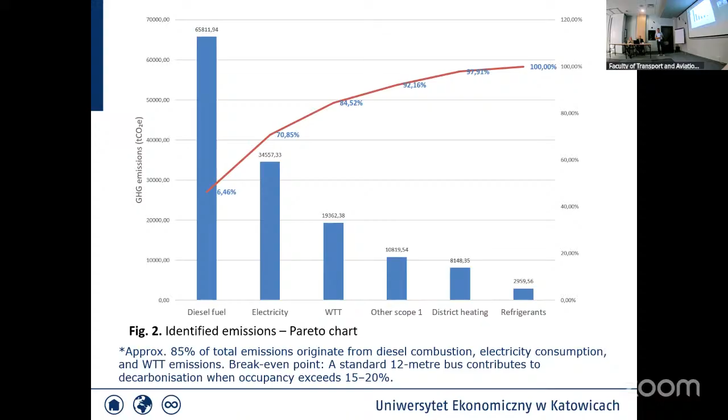And reporting: in the European Union, reporting is very complicated. Reporting under European standards, ESRS, is difficult for municipal companies. But the European Commission recommends the voluntary standard reporting, VSME. In our opinion, VSME is a good solution for municipal companies. It is not only a reporting tool, it is also a tool for better management. The standard can lower the entry cost of ESG reporting, build a data culture, and prepare organizations for banks' expectations.